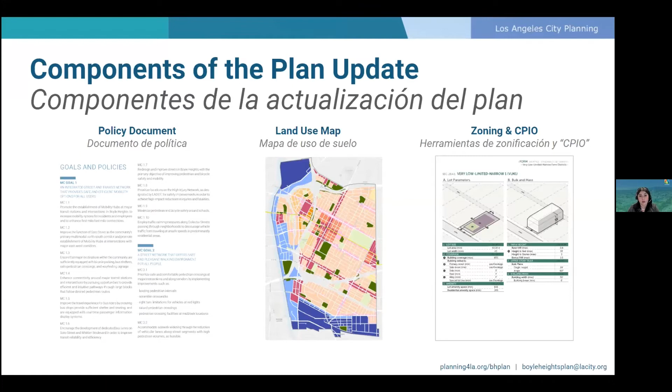Now that we've established a bit about what a community plan is, let's shift our focus to why we're here today, the Boyle Heights Community Plan Update.

Boyle Heights today has approximately 89,000 people, and the median household income is about $47,000 a year, which is about half of the countywide median income of $91,000 a year. The average household size is about 3 to 4 people, which is higher than the citywide average.

The Boyle Heights plan area is about 6 square miles and has about 24,000 dwelling units. Boyle Heights is a relatively young community with almost half of all households having one or more persons under 18 years old, and 75% of all households are occupied by renters, which make issues related to housing affordability and displacement especially important.

The majority of units, almost 90%, in Boyle Heights were built before 1978, with about 71% of all multi-unit properties in Boyle Heights being built before 1978. The city's Rent Stabilization Ordinance, or RSO, applies to multi-unit properties built before 1978, which makes a high percentage of the existing housing stock in Boyle Heights subject to the RSO.

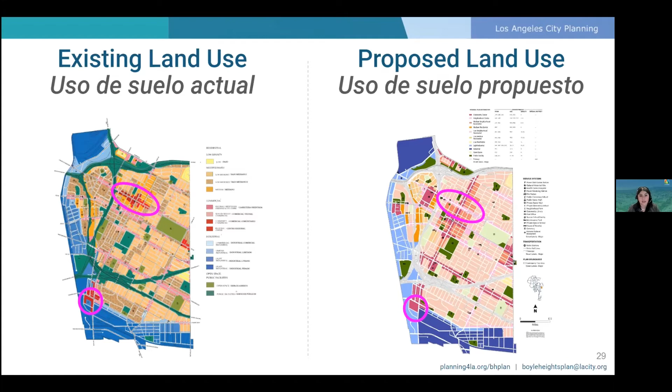Let's take a closer look at the Sears site. The plan proposes to change this site to a land use designation of community center, which would continue to allow the same uses as the land use and zoning do today, including both commercial and residential uses or a combination of the two. But it would no longer identify the site as an area where the greatest intensity of development should go. The map on the left shows the existing land use designations for the site.

The area in red is designated as regional center, and the blue area is designated as light manufacturing. The map on the right shows that the land use designation is proposed to change to community center as part of the Boyle Heights Community Plan update, shown in pink. This is a change to the land use designation, so that means there isn't a change to the Sears building itself or to the generally permitted uses.

Similar to the current regional center land use designation, the proposed community center designation would also allow a range of uses, including residential and commercial uses, or a combination of the two. There have been some recent media reports and community meetings about the property owner's initial conceptual plans for a shelter and social services on this site. It's important to be very clear that the property owner has not submitted permits or any other plans for review to the city for this project at this time.

Changing the land use or zoning through this community plan update would not automatically clear the path for the property owner to develop the site without permits or other necessary approvals. Any future development projects on this site would have to go through a separate permitting and approval process that is completely independent from the process to update the Boyle Heights Community Plan.

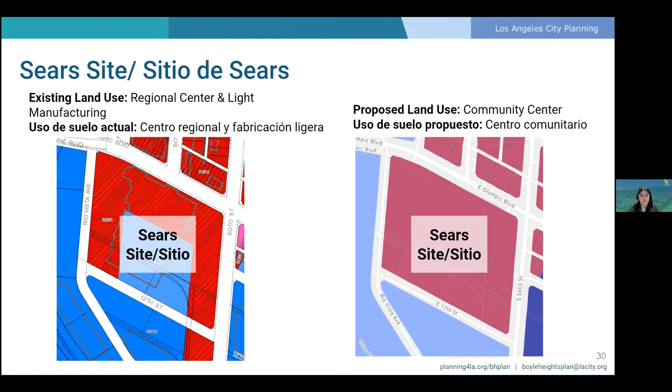The land use designations that I just covered are generally broad categories that state at a high level what kinds of uses are allowed, and the zoning applied to each property contains the more specific regulations of what can be built. The Boyle Heights Community Plan update will be the second community plan in the city to use the new zoning code being developed for the city. This means that each property in the community plan will be assigned a new zone, but only in some cases will it change what intensity or uses can be built on that site.

Part of today's presentation will review some new zoning tools that we've been able to incorporate in response to community feedback in Boyle Heights that we don't have the tools to do under the current zoning code. To provide a brief overview of the pieces of the new zoning, here's an example of the 5 zoning modules or districts that will be assigned to each property.

Form districts regulate building size. Frontages regulate how the building looks from the street. Standards contain regulations like parking and landscaping. Use districts list what specific uses are permitted or are not, or require a process. And density districts regulate how many units can be built on a property if residential uses are allowed. Next slide.

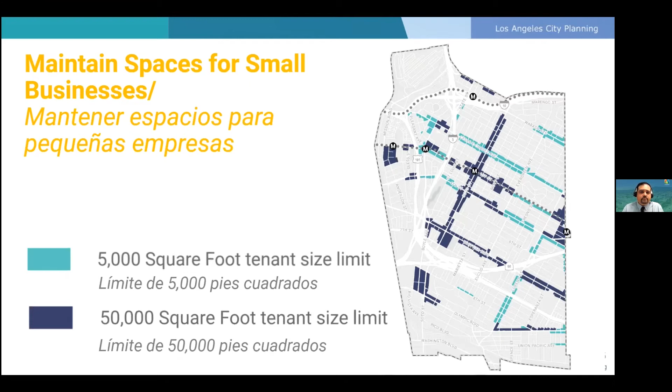Another zoning tool the community plan is proposing is to accommodate tienditas in residential zones. Tienditas, or corner stores, are essential in providing the Boyle Heights community with food items and household goods within walking distance. Many tienditas currently exist in Boyle Heights today in areas zoned for residential uses only, meaning they are currently non-conforming, and this also prevents new ones from opening in residential areas. New zoning regulations allow limited introduction of non-residential uses such as new corner stores in residential neighborhoods, providing new opportunities for small business and more residents access to food and household goods. These uses are subject to the following limitations: a maximum of 1,500 square feet in size, limited hours of operation, and can only be located on a corner property. In addition, based on feedback received over the years, alcohol sales will no longer be allowed in new tienditas throughout the plan area. The plan also includes policies and programs that encourage these corner stores to provide fresh produce and groceries to the community, with future programs and partnerships identified to help incentivize sales of fresh produce in these stores.

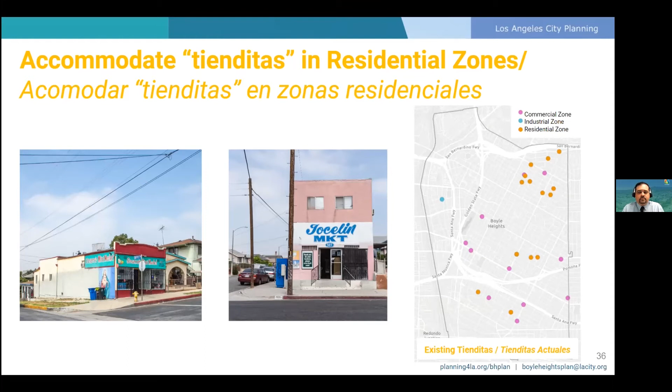In addition to zoning to allow for new commercial amenities in residential neighborhoods, the plan uses zoning to ensure new development is reflective of the existing character in areas identified as potentially historic. One of the most notable historic landmarks in Boyle Heights is the historic commercial corridor of Cesar Chavez Boulevard between Mott Street and Cummings Street, which is also designated as a Los Angeles Historic Cultural Monument known as the Brooklyn Avenue Neighborhood Corridor. The plan introduces new regulations through the zoning, specifically a special character frontage that will be applied to the stretch of Cesar Chavez, which requires new buildings to use some of the design elements found on buildings today in new development. The character frontage is a component of the zoning and does not require additional design review procedures.

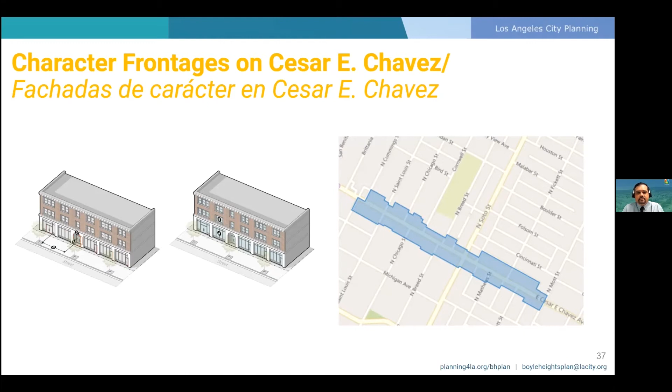A similar approach is being taken with certain residential pockets in the community that have been identified as potentially historic in the city's Survey LA, which is the city's historic resources survey. These areas will be zoned with a residential character frontage that would require architectural elements reflective of the community history.

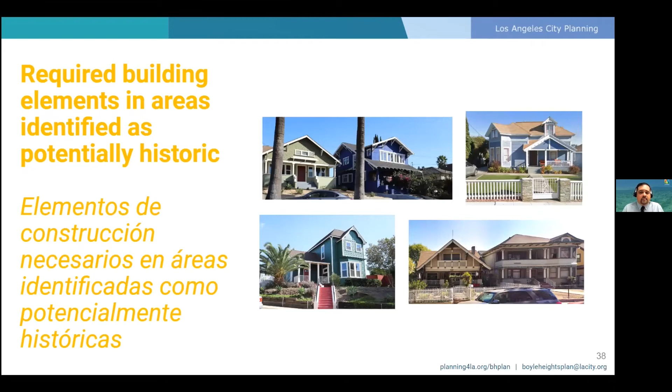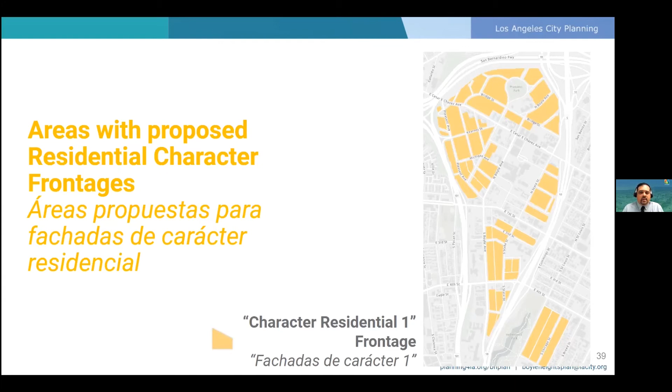The residential character frontage will be applied to the area shown in orange on this map, the area between the 101 and Interstate 5 freeways, as well as on certain streets near Hollenbeck Park. In addition to the character frontage, to make sure that new development reflects the existing historic architecture, the plan introduces a new process that forestalls demolition for identified eligible historic resources within this area shown in orange on the map.

Beyond new zoning regulations for potentially historic areas and small businesses, over the years of outreach we have heard from community members the importance that street vending plays in both the identity of Boyle Heights as well as the local economy. Street vending is a key source of fresh and prepared foods in areas underserved by major grocery chains, and they are a means to activate the public realm as well as provide opportunities for entrepreneurship. The plan supports current street vending efforts at the state and local level and contains policies that encourage cleaning, preparation, and disposal facilities as part of future projects in the community.

Now that I've walked through what the plan is doing to maintain the existing neighborhood identity, let's walk through some measures we're taking to address existing environmental injustices. In Boyle Heights today, there are many examples of incompatible land uses, meaning industrial land is next to residential or other sensitive uses. Coupled with freeways that cut through the neighborhood, Boyle Heights residents bear the burden of contamination from freeways, truck traffic, and industrial land. Residents and community groups have mobilized around issues of environmental injustice in the community for decades. In response to this, the plan uses a number of approaches to address issues of community health and environmental injustice.

The Cleanup Greenup Overlay, or CUGU, was adopted in 2016 and was a years-long community-driven effort to establish green zones, which means it adopted new standards and regulations to protect sensitive or residential uses from nearby heavy and noxious uses. This ordinance was adopted as an overlay, and as part of the Boyle Heights Community Plan update, the regulations from CUGU will be incorporated into the new zoning for the Boyle Heights Community Plan area, embedding them as part of the permanent zoning regulations for the community.

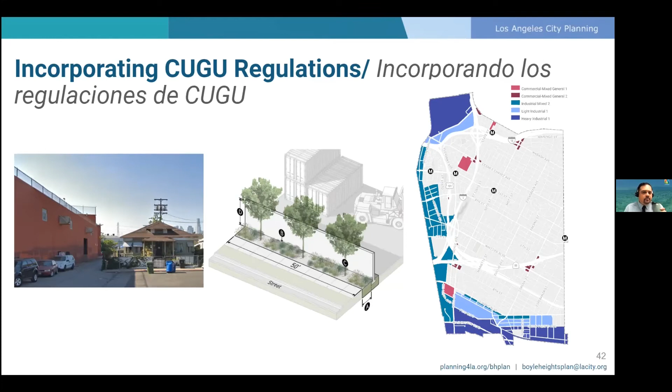Through the years, another big concern raised has been issues of soil contamination, in particular the decades of lead contamination from the Exide battery recycling plant. The plan includes new requirements to better address contaminated soils and minimize public health risk by requiring soil sampling for projects that include ground disturbance, meaning projects must complete a soil test before getting a permit to check for elevated levels of lead or arsenic on site. The applicant must either prove there are not elevated levels or clean up the site before proceeding with their project. This requirement applies to all properties within the Boyle Heights Community Plan boundaries.

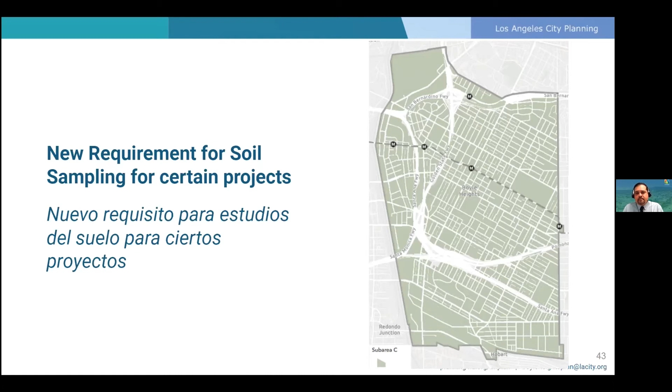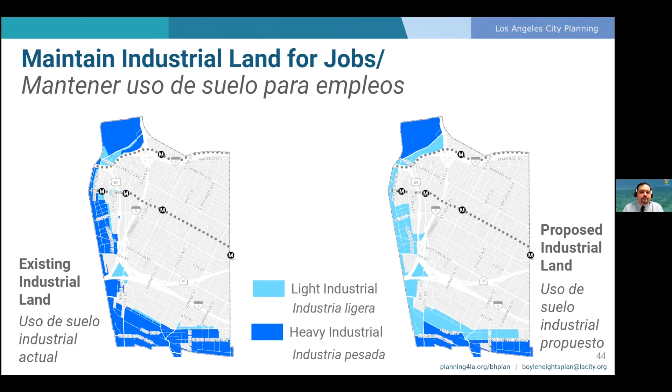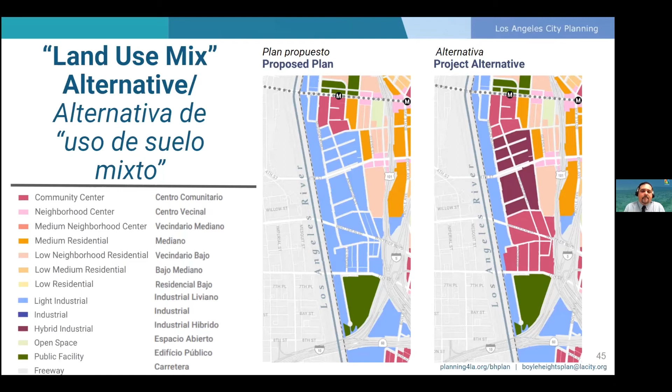Throughout the adoption process, including at tonight's public hearing, city planning will continue seeking input from the community on what future uses people would like to see in this area of the plan.

As we've covered earlier in this presentation, housing has been one of the key topics we have heard from a wide variety of stakeholders throughout our engagement process. We have heard the need to create more affordable housing, affordable to residents of Boyle Heights, and the need to maintain existing housing throughout residential neighborhoods, which is often rent stabilized or more naturally occurring affordable housing. We've also heard concerns about residential displacement, overcrowding, and housing quality.

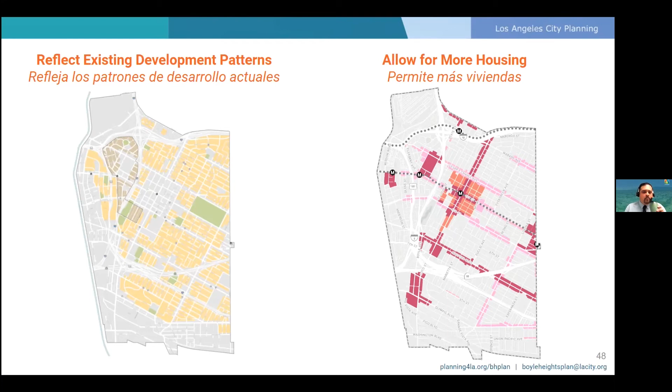When we talk about safeguarding our residential neighborhoods, let's take a look at the type of development that is currently allowed. In most of our multi-family neighborhoods, the zoning today allows a developer to build larger buildings than what currently exists on most residential properties. This creates an incentive to demolish existing housing and replace it with larger, often more expensive units.

To address this, the proposed zoning reduces a floor area ratio, or FAR, from what the existing regulations are in most of the residential areas. FAR regulates how many square feet of building can be built on a lot based on the size of the lot, which contributes to how large a building can be.

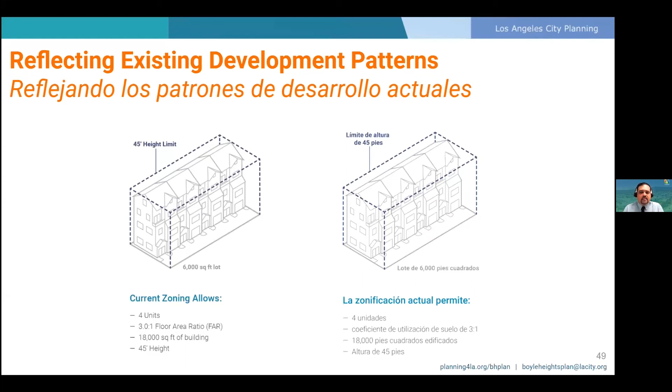Most residential areas in Boyle Heights today are developed with multi-unit developments with 2 to 4 units and a building square footage that is much lower than the maximum allowed per current zoning.

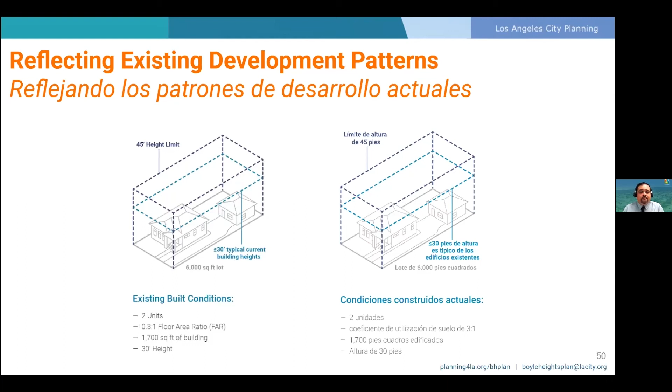The proposed zoning right sizes the amount of FAR allowed to reduce the redevelopment pressure for these areas, making sure new developments are a similar size as the houses and apartments seen throughout Boyle Heights today. The new regulations would keep the same density regulations, meaning the same number of units could be built, but at a more appropriate size and scale to the neighborhood.

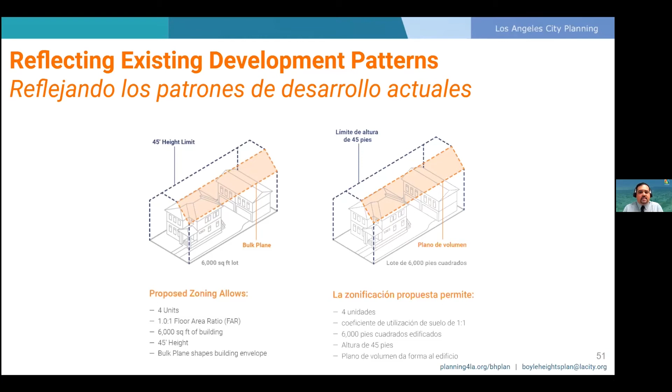As demonstrated in this diagram, the proposed zoning allows for development patterns that are more compatible with existing buildings in residential areas, while conserving the ability to build a similar amount of units on a given property. This is a key zoning tool in the plan strategy to safeguard existing households in Boyle Heights by minimizing displacement due to wholesale redevelopment of existing units.

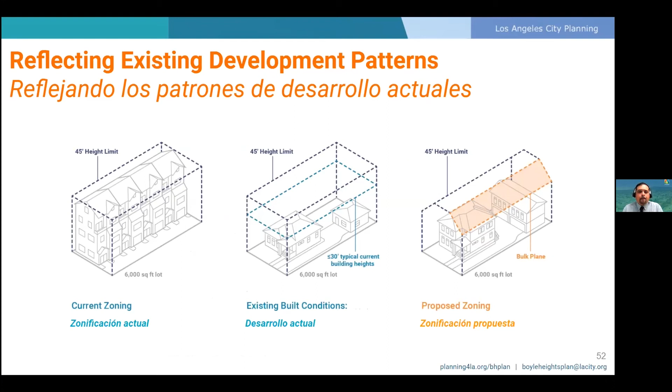Now let's take a look at another piece of the zoning regulations proposed for the lower scale residential neighborhoods in Boyle Heights to help reflect what is already there today. Many residential properties in Boyle Heights are developed with a primary structure and a smaller secondary structure located close to or up to the rear property line. Under existing zoning regulations, a 15-foot setback is required in most residential zones in Boyle Heights, making it challenging to update the structure or convert it into a residential use.

Under the new draft zoning, the rear yard setback would be reduced to 3 feet, allowing existing non-conforming structures to be more easily permitted or converted to residential units. This change is an important tool to encourage gentle infill throughout the neighborhoods, allowing for multi-generational households to have more space or allowing for additional rental income for a homeowner.

This also allows for new units to be built on existing multi-unit properties without losing the existing units to redevelopment, encouraging property owners to retain units subject to the rent stabilization ordinance and maintaining the more naturally occurring affordable housing stock in the planned area.

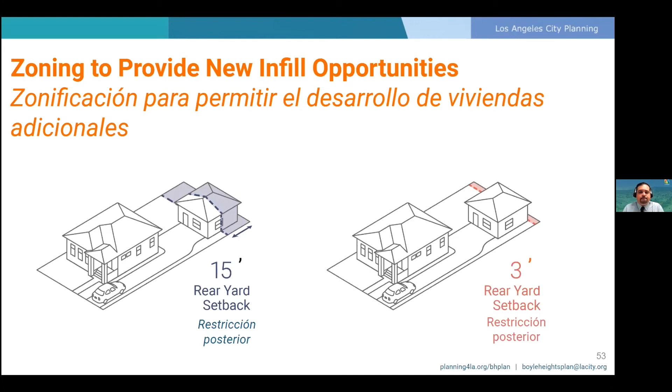Now that we've covered how we're reflecting existing development patterns to alleviate development pressures in the neighborhoods, let's talk about how we're incentivizing new affordable housing in Boyle Heights.

The Transit-Oriented Communities Program, or TOC, began in 2017 after the passage of Measure JJJ by LA voters. The Boyle Heights Community Benefits Program will replace the TOC program within the Boyle Heights plan area boundary and tailors the incentives as well as eligibility requirements to Boyle Heights. This means that in areas with high concentrations of rent stabilized units and built out multi-unit housing, the incentives offered are reduced from what is allowed under the TOC guidelines.

The proposed program also tailors the eligibility requirements to the needs of the community, requiring a greater percentage of affordable units than TOC does today in Boyle Heights, and by requiring larger unit sizes to be built to accommodate multi-generational households.

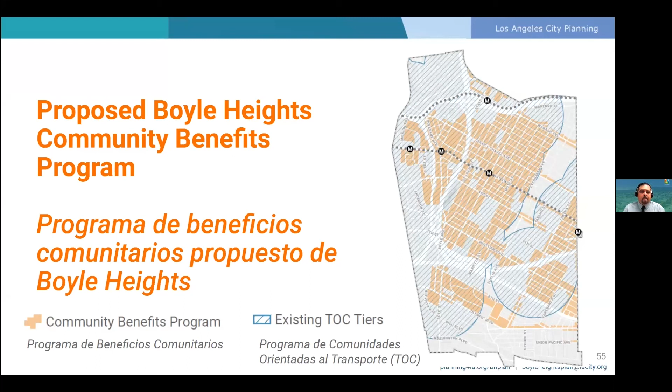For an applicant or developer to utilize this optional Boyle Heights Affordable Housing Incentive Program, a project must dedicate a percentage of the total units in the building as affordable units, include at least 30% of all units in the new development with 2 or more bedrooms to accommodate varying household sizes and multi-generational households in Boyle Heights. And a project must include at least 5 units. This means that an applicant constructing a duplex or fourplex cannot utilize this program to get additional development rights like height or density.

What is AMI and what does it actually mean for these units to be affordable? The State Housing Department, or HCD, sets the rent limits each year based on the area median income, also called AMI, which is established based on countywide median income. The rent limits take into account household size and the income range.

For example, based on the 2022 AMI, a family of 4 with an income under $35,750 would be considered an extremely low income household, making 30% or less than the AMI, and would qualify for a unit with rents capped at $658 for a 3-bedroom unit.

Throughout our outreach, we have heard from many residents and community organizations that housing needs to be affordable to residents of Boyle Heights. Based on that feedback, in our next draft, we are planning to include a new affordability category to the incentive program called Acutely Low, which would set income limits at 0 to 15% of the AMI, which would be $13,650 for a family of 4.